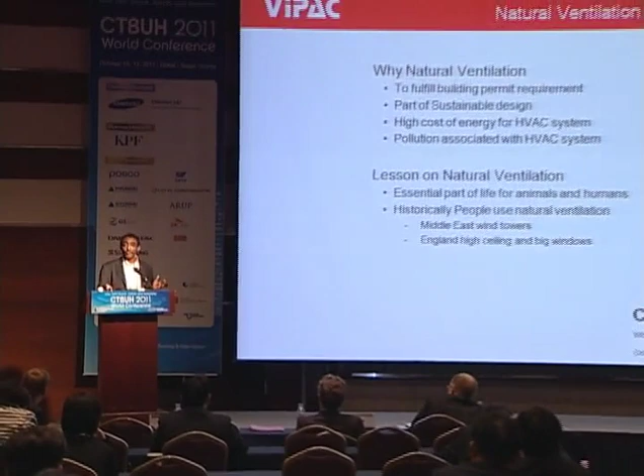Why natural ventilation? What is the motivation to have natural ventilation? It can be to fulfill a building permit requirement. In some parts of the world, building permits require that, especially for residential buildings, a certain portion of areas, or 60% of it, is naturally ventilated. That can be a motivation to use natural ventilation.

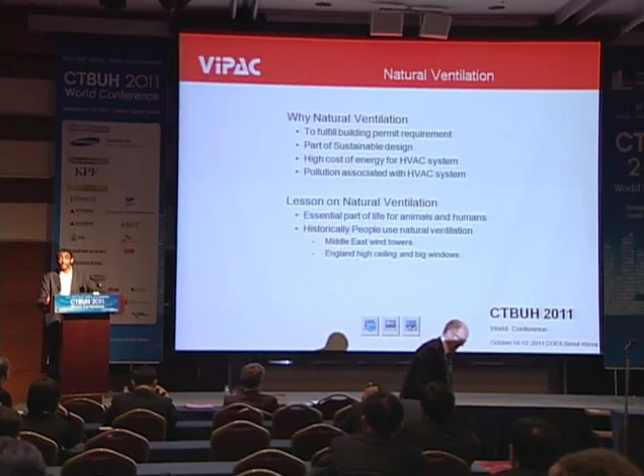Or it can be part of a sustainable design. Also, the high cost of HVAC systems can be a motivation to use natural ventilation, along with pollution associated with HVAC systems. What we want is to reduce the carbon footprint of the building. And how can we do it?

To reduce the carbon footprint, the material we use for the building matters, but also natural ventilation is one part of it.

When we talk about natural ventilation, it's not something new. It is essentially a part of life for animals and humans. Historically, it has been used in many ways. Some examples I've listed here: in the Middle East, wind towers catch wind at the upper level and divert it into the internal space so they can ventilate themselves.

This has been used for many years. After a while, in the Middle East, when they used the wind tower, they understood what the climate looks like. We studied the wind towers in Dubai, looking historically at how they are oriented. It shows they understood this, as they are all turned to the northwest. So they have been using that.

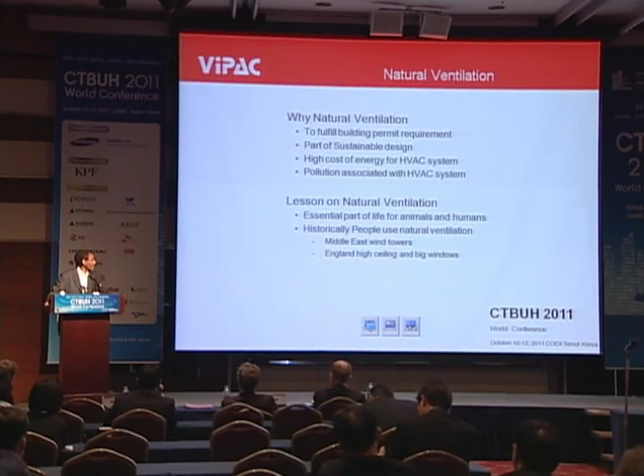But now, the cost of energy and other considerations brought it back to the picture.

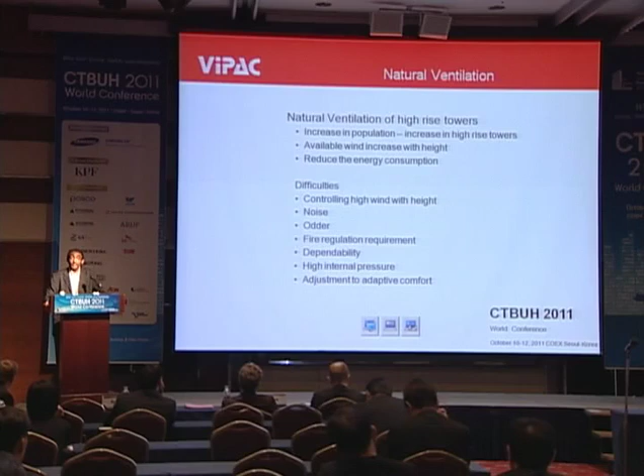When we think about natural ventilation in the context of high-rise towers, what is the motivation? We know the population in the world is increasing, density is increasing, so there is high demand for high-rise towers. Having high-rise towers also has to be more efficient, less cost. How can we achieve that? For that, natural ventilation comes into the picture.

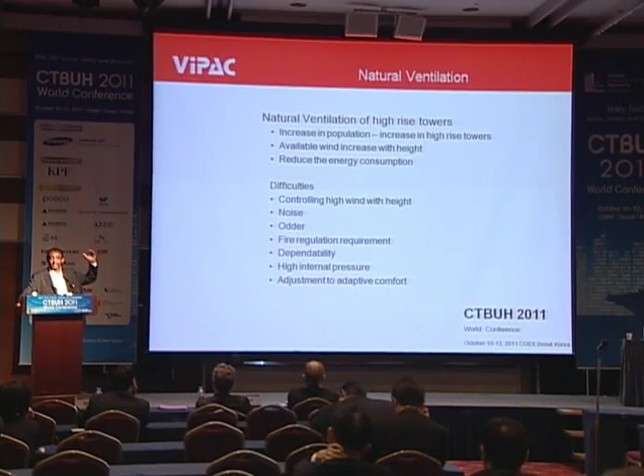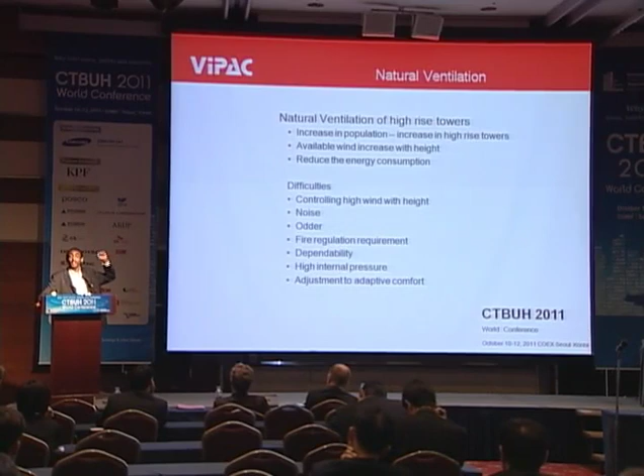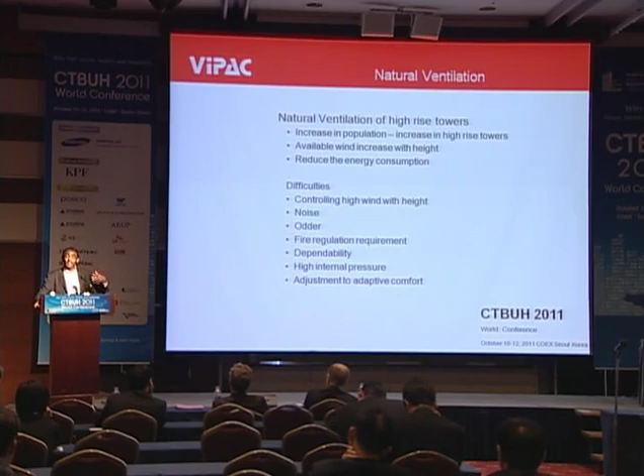Professor Samuel mentioned that when we go higher in height, the wind speed increases. That means wind power is there, but it is a blessing as well as a curse. A blessing because wind is available there and you can use it; a curse because if you open some space, it can get into the internal space and cause damage. But the availability of wind is something we can use for natural ventilation, and by doing that, we reduce energy consumption. What are the difficulties?

Controlling the wind with height means it can produce damage, as I said. It can also be when we open something to admit outside air to the inside, we can also open space that lets noise from outside get in.

In the first session, there was a question about when you open something, there will be noise. Actually the question is based on stack effect. It will be a stack effect, and lift noise will be produced. Actually, yes, so stack effect as well as wind-driven can produce that kind of whistling noise.

But there are ways to get around that. Why is that kind of noise generated? Because of the pressure difference, a flow is driven. So you have to equalize the pressure between the inside and the outside. You can achieve that by even drilling a hole, by diverting the wind from getting to the lift to another direction. We have encountered this kind of problem in existing buildings.

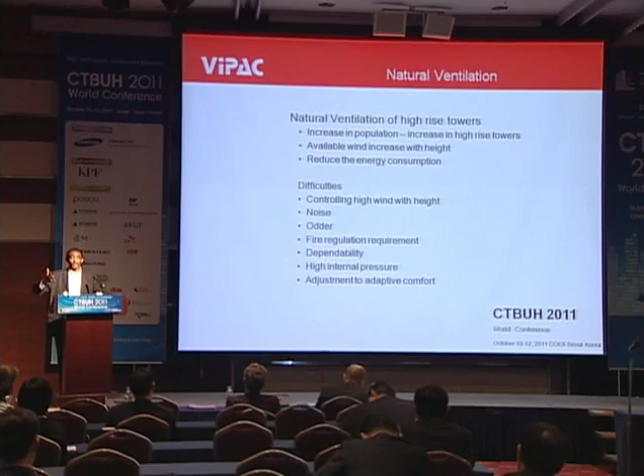At first, when I started, I said that the availability of wind can be a curse. That means if someone living in a high-rise tower leaves the window open, the internal pressure of the building increases, causing a lot of damage.

When we are doing the study, one of the considerations is, well, to eliminate that kind of problem, there are a lot of solutions. One is the building management system, or installing a control.

The other thing Robert mentioned is comfort. One reason we use natural ventilation is to achieve thermal comfort. And that thermal comfort is something subjective - how are we going to fulfill that subjective thing?

You can design something for natural ventilation and people say, oh, it's not comfortable. So it needs people also to accept and expand their limitations. I lived for many years in Canada, Alberta - it is very cold, and at 5 degrees centigrade I used to go out without a jacket. But when I moved to Australia, at 5 degrees centigrade I have to put on a jacket. So depending on the area, I adapted to the situation. But if people are saying no, my comfort is when it's 18 degrees centigrade, it's very difficult to fulfill that.

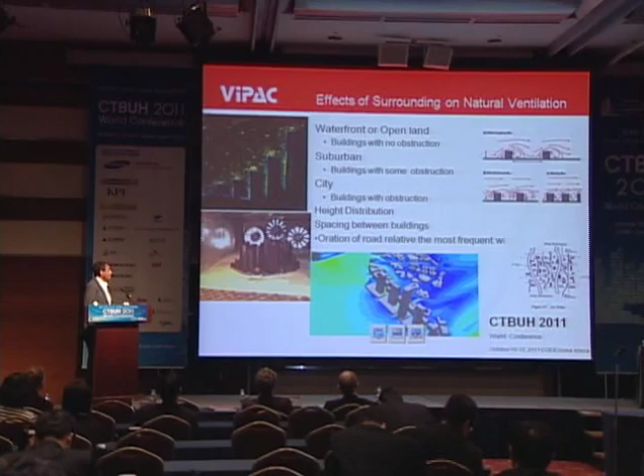When we are talking about the surroundings, there are different kinds. One is a waterfront, meaning no obstruction at all - buildings in the waterfront have no obstruction. Or it can be suburban, with some obstruction but not a lot. Or it can be city surroundings with a lot of obstructions.

The height distribution of the towers plays a big role. If this is the most frequent wind direction, then I know the wind will be available in different locations. But if the wind comes from this direction, then I'm blocking it. So the height distribution plays a big role.

The spacing between buildings has a big role. If there is good spacing, then this building is going to get wind. But if they are very close apart, then the wind flows over it, and I'm not getting a lot of wind at the bottom.

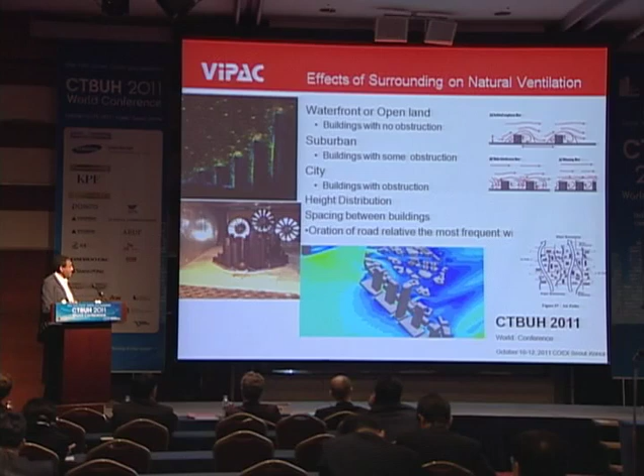The orientation of the road relative to the most frequent wind is important. If I have wind coming from the sea, and I have a wall of towers here, then I'm blocking the wind from here. And the opening of the road shape, how it's oriented, plays a big role. That is what I mean - town planning has a big part to play.

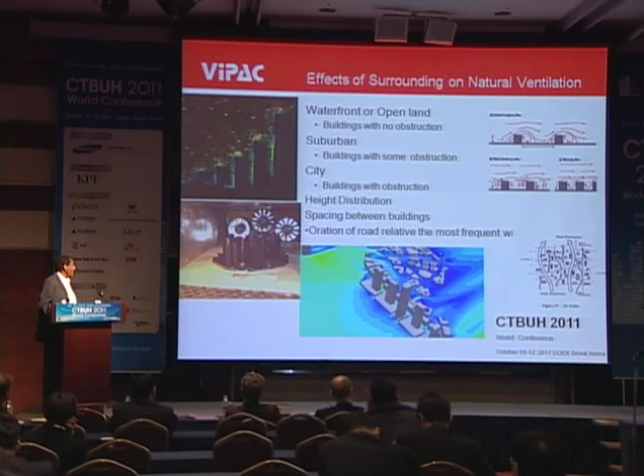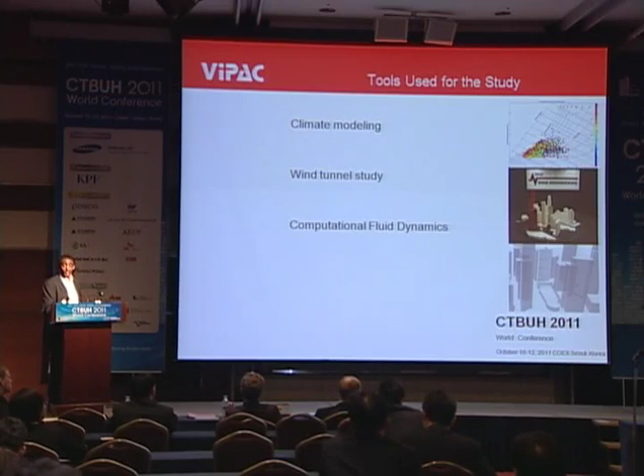In the present study, we used a climate model, a wind tunnel study, and computational fluid dynamics to investigate the effect of the surroundings on achieving natural ventilation. When talking about climate, the important components we look at are temperature, humidity, wind speed and direction, and the variation of climate with time - daily, monthly. That is important to decide where my openings are going to be. The variation of climate with direction is also important. These are the main things we have to consider.

Based on this information, we decide, okay, I can have natural ventilation for this month, and I can't have it for this month - I may have to use some kind of treatment.

What we have done in this study is pick one of our projects, one building, and then we placed it in different locations of Melbourne - in city surroundings, in an open area - to see the effect.

So when I am presenting, here is the climate we are looking at - the climate we are using is the Melbourne climate. This is a psychrometric chart, good for understanding. It has information on temperature, humidity, and speed, but it's colored based on wind direction.

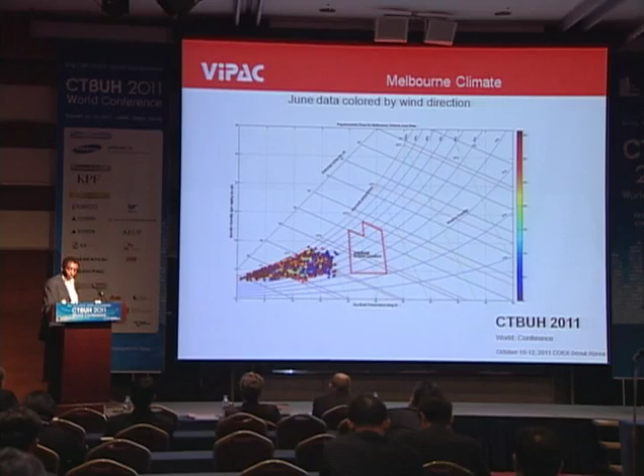If I look at the June data, colored based on direction, there are a lot of hot days, and that heat is coming from the north - this is zero - and the colder air comes from the south. So it tells me the directionality, but for this, if I admit it directly to the internal space, it will be a problem.

When I'm looking at the March data, most of it is a good one, which I can admit to the internal space. What kind of treatment do I have to use? The psychrometric chart - we can divide it and learn that if it's humid, what kind of treatment we have to use, and if it's cold, what kind of treatment. So it is a very good tool.

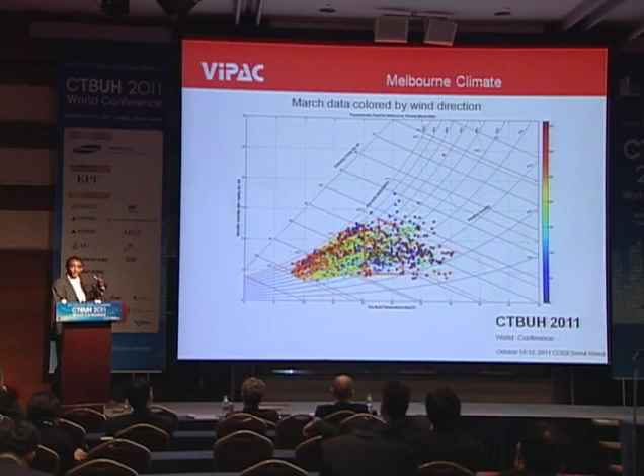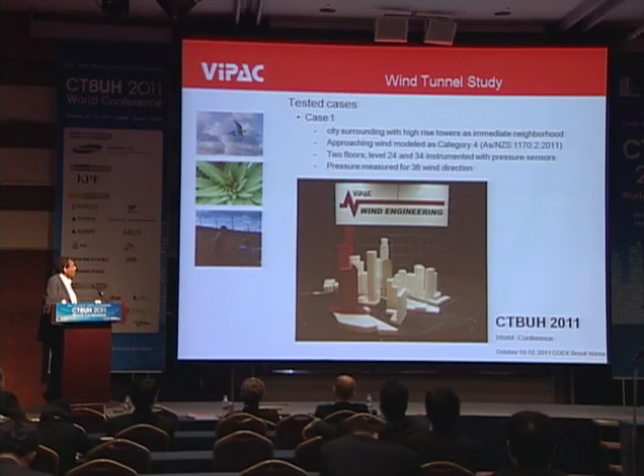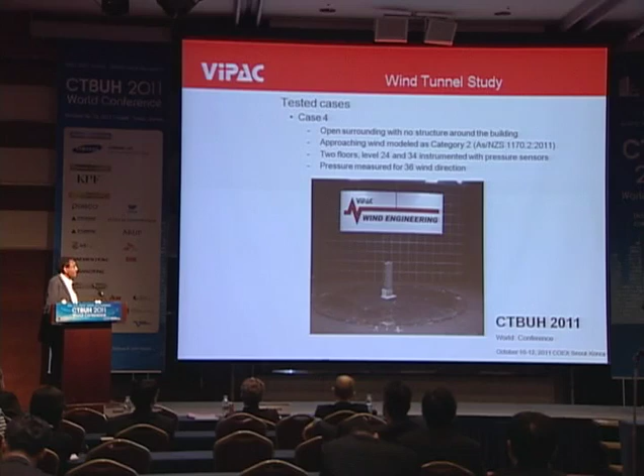Okay, what we used is 4 cases - this is a city case, 1 and 2, city cases, and this is a suburban case, and this is an open one. These are the 4 cases we used. And in the CFD, we used the city case.

This is an open one. And when we see the pressure at different locations - observed at this point - we see that the city 1 is lower pressure, and the open one is higher pressure. At different points, I'm seeing that it's moving from the southwest when observing it at this point. And at this other point, it's moving. And now at the north, it's moving.

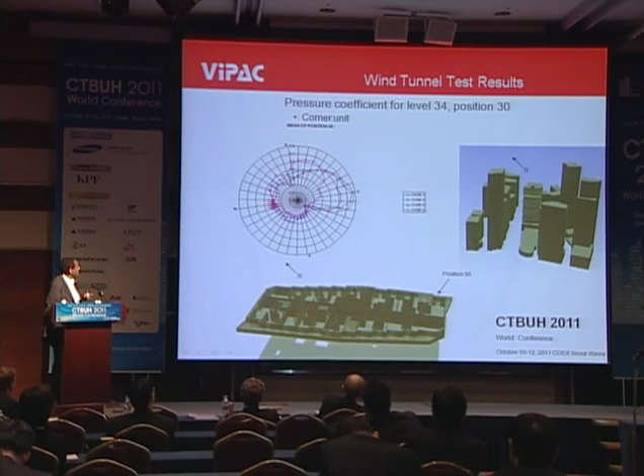In here you see that for the city case, the 2 city cases, even though the wind is coming from this direction, the main high pressure is from this direction, and for the other one, a different direction. So the directionality plays a big role. And here also, even though the wind is coming from the east direction, it remains from the other direction.

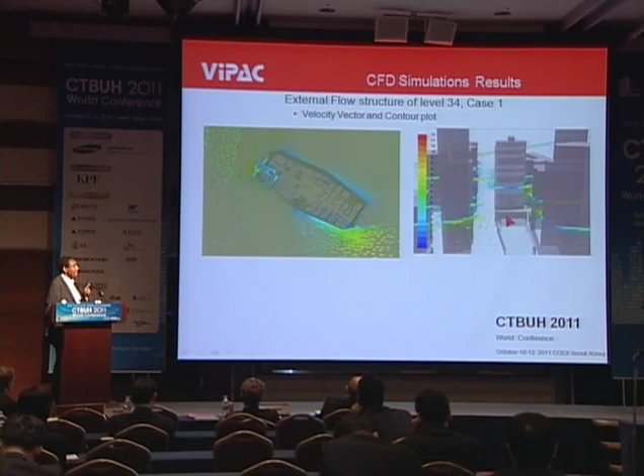When we are looking at the CFD, this one is for the city case - it shows a lot of turbulence. For the open one, it doesn't show a lot of turbulence.

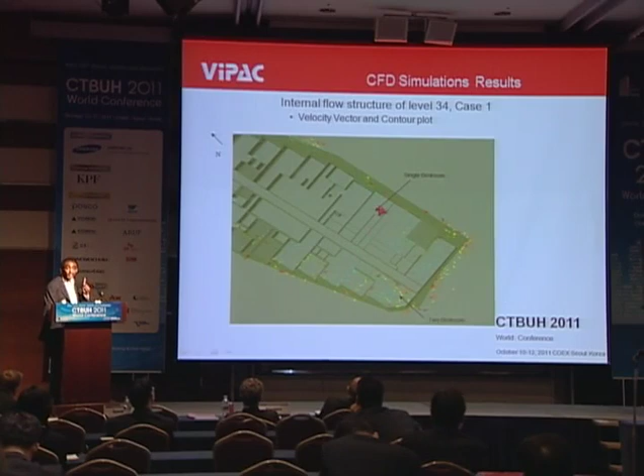When we are looking at the internal space, this is a 2-bedroom one - there is a lot of circulation because of having 2 openings. A 1-bedroom, just because of a single opening, has a minimum flow. This is a single bedroom, which you see has a lot of circulation in a 2-bedroom.

Oh, this is by mistake actually - this is the 2-bedroom one. This is a single bedroom, which has less.

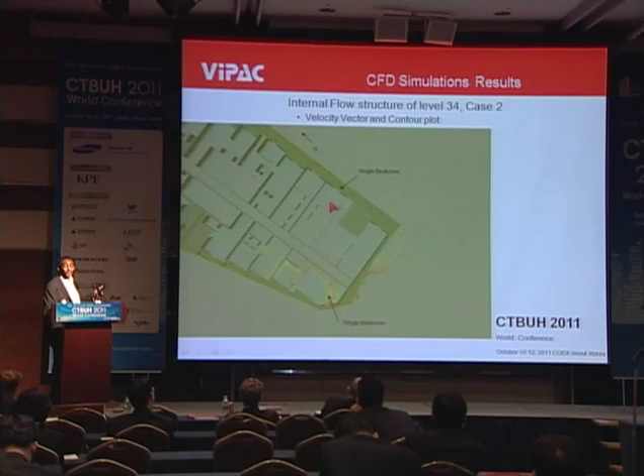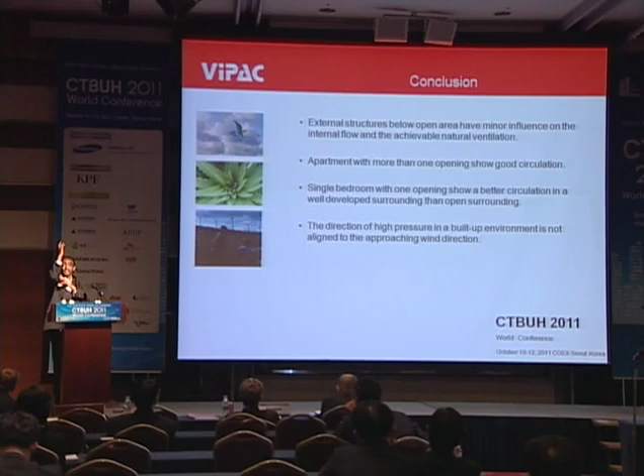So in conclusion, what I can say is the external structure, which I ran so fast - the 2 cases we simulated, one is open and one is suburban, it's almost open. So the 2 cases are almost similar. That tells us that whatever you are considering at the top floor, whatever is happening here doesn't have a big influence on what you are doing here.

The apartment with more than 1 opening shows good circulation. A single bedroom with 1 opening shows, in a city environment, marginally better circulation than with an open environment. The only explanation I can think of is that when you are in a city environment, there is a lot of turbulence, and even though you have 1 opening, there are fluctuations.

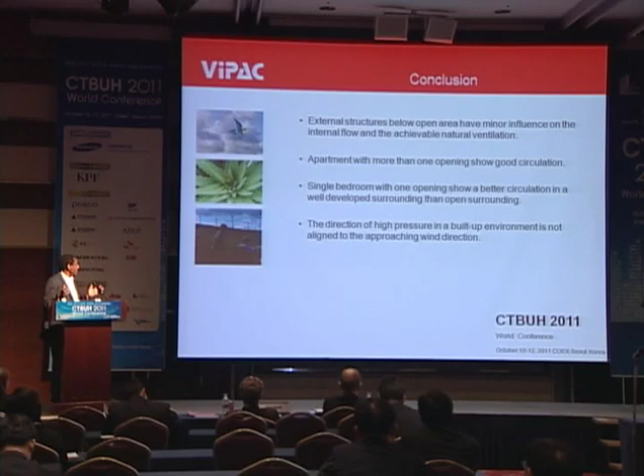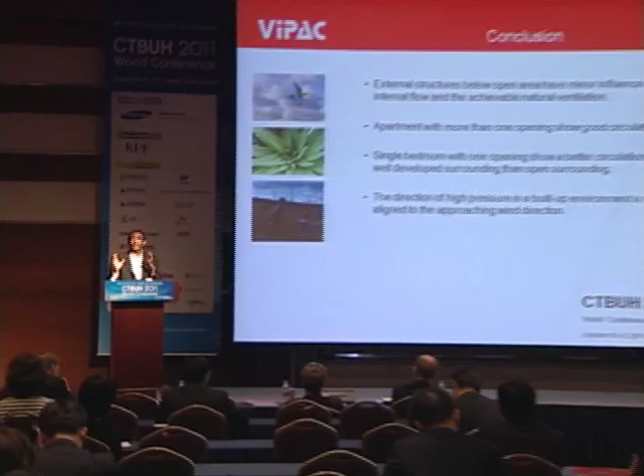That is what can make a marginal difference. The direction of high pressure in a built-up environment is not aligned with the approaching wind direction - so what it tells us is, well, I understand the wind directionality, and I can design where the opening is going to be and where I'm going to admit and exhaust the airflow. We can't say that in a complex environment.

The physics defines complex flow by 2 things - one is with Reynolds number, a higher Reynolds number leads to a more complex flow. The other one is with the structure - if you have a lot of structures, you form a complex flow. So in a city environment, it's a complex flow, so it is not easy to determine.